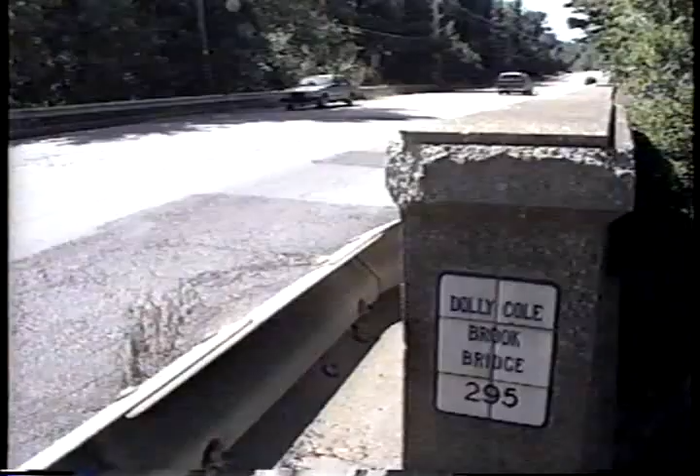Across the nation, roads are crumbling, and the bridges that span or link these roads are going with them. In fact, over 40% of the nation's 575,000 bridges today are in need of repair or replacement, and a majority of those are in rural communities, where small bridges cross over rivers, streams, and wetlands.

Rhode Island is no different from the rest of the nation when it comes to road conditions. Many of our 700 or so bridges are in rural areas, ineligible for federal highway assistance when they need reconstruction. The State Department of Transportation is responsible for monitoring their condition, posting load restrictions, or closing those that are unsafe

altogether. In terms of percentage of bridges, I might pull a figure of like 25 to 33% of the bridges are needing some sort of work. Of that, a good percentage will need replacement.

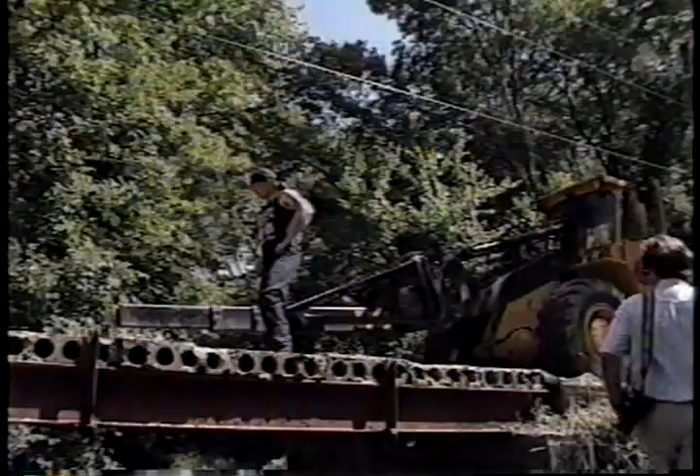You know what we're going to have to do? When you lift those planks, we're going to have to store them off to the side, bring the load bed out, load them on the load bed, and cart them out, because there's no way you can put these in the truck.

Walter May, the Public Works Director for Foster, Rhode Island, has become well acquainted with the problems of bridge deterioration in a small town. A deteriorated road is one thing, but a deteriorated bridge can shut down a whole section of town. And the rating of this bridge was down to about 6 ton, which would prohibit school buses, fire trucks, some emergency services, contracted for services, deliveries, all of those types of traffic that have to have access to the public have to detour around so they can avoid a low-rated bridge.

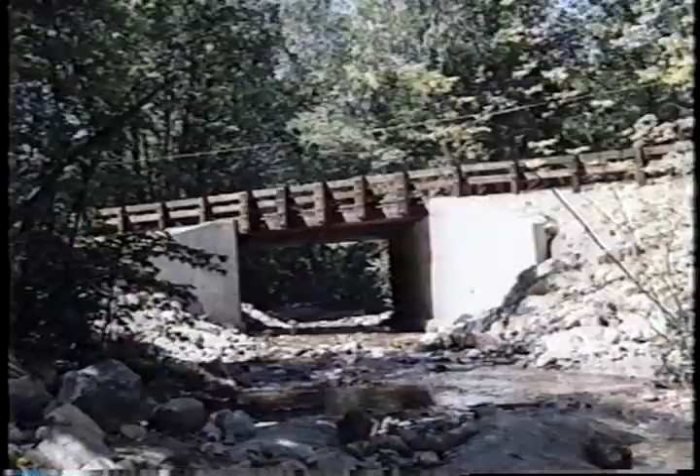Recognizing this threat to America's crumbling infrastructure, the United States Congress funded the Timber Bridge Initiative in 1989. Using methods pioneered in Ontario in the 1970s, over 200 demonstration timber bridges have been built across the country to show that small communities can replace their bridges in less time and with less money using locally grown, pressure-treated wood, rather than concrete and steel in construction.

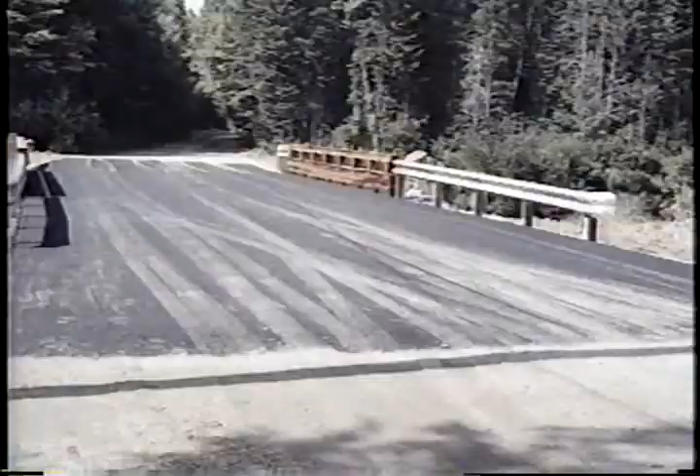Rhode Island RC&D is very interested in this because it does promote rural development. It has local people solving local problems and using local resources to do it. In this video, you'll see how, through a collaborative effort of federal, state, and local agencies and businesses, a demonstration timber bridge was constructed in Foster on North Road, spanning 22 feet across a small river.

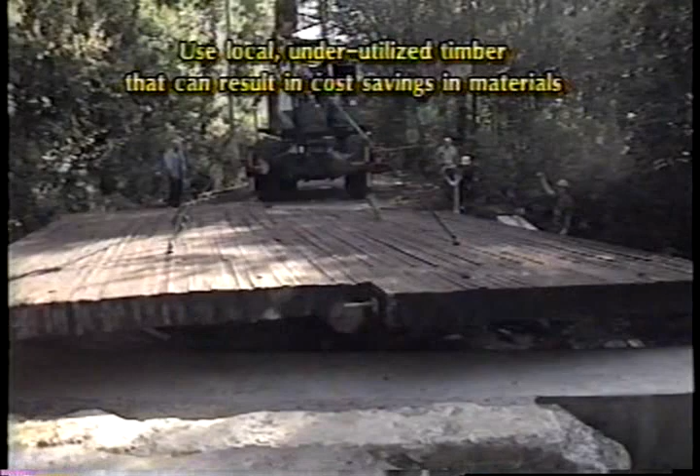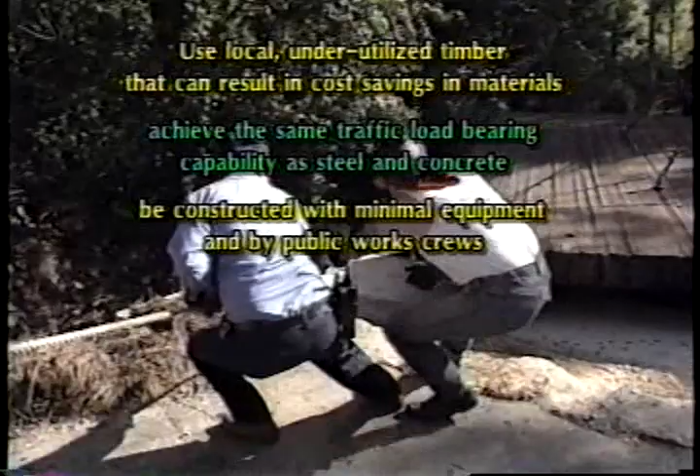You'll see how this bridge was engineered to use local underutilized timber that can result in cost saving in materials, achieve the same traffic load bearing capability as steel and concrete, be constructed with minimal equipment and by public works crews, be installed in a fraction of the time required for steel or concrete bridges, and reduce maintenance costs over time.

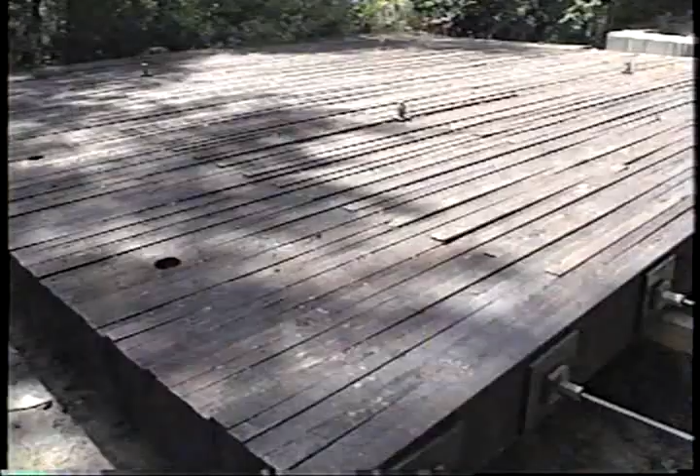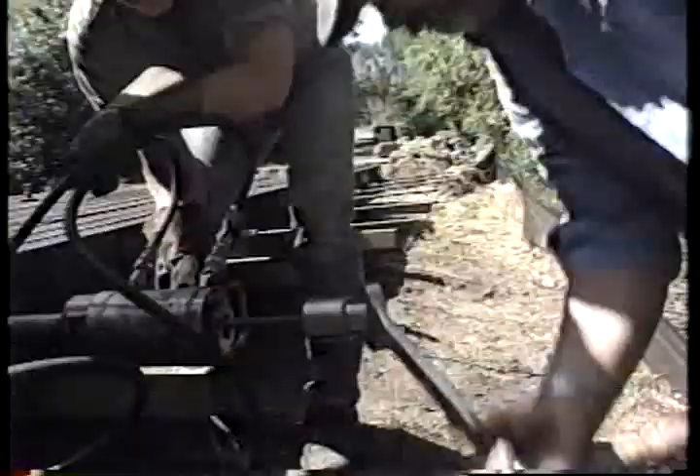In typical bridge construction, for a lot of the steel and concrete bridges, you have steel girders and then you have a deck. In this case, for the Foster Timber Bridge, you have 2x10 red oak planks, which are all bolted together with about, I think, 60,000 foot-pounds of torque. And it has plates pushing it together, too, with the nuts. And that makes it like one, basically, 10-inch thick plank. And it's incredibly strong. It serves as both the deck and the girders.

These bridges are not quite the old-style timber covered bridges that everybody imagines. You could put that type of structure over one of these. They look pretty modern. They are contemporary looking in their design now. You won't be able to tell it's wood. It'll be covered with asphalt, so when you're driving over it, you won't know it's wood.

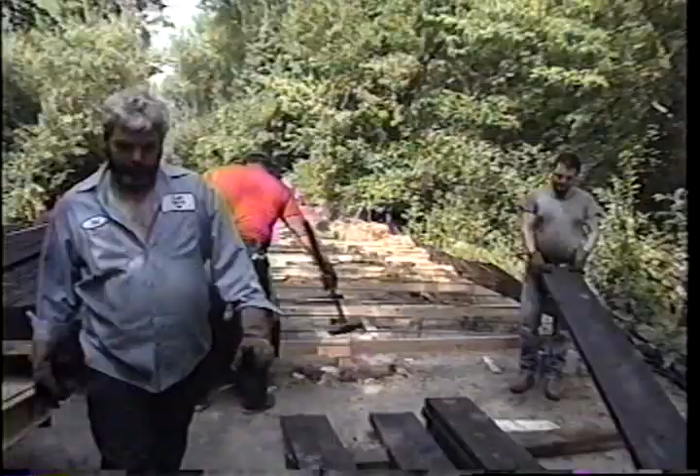All of the bridges in Rhode Island traditionally have been designed, that is, interstate bridges and every other one that we've had a part to do with, have been designed for what we call a 20-ton two-axle vehicle and three-axle tractor trailer that weighs 36 tons. And this particular bridge is designed to meet those loadings, and I think it may exceed those loadings. It'll be able to handle any of the normal traffic that a bridge would be required to take.

A 20-ton capacity will be more than enough for school buses, emergency vehicles, and trucks passing through North Road. But the old bridge was only 14 feet wide, and the approach had a skew in it. Talking about a road realignment, widening the bridge, increasing the capacity, and changing the construction of it to accommodate an easier replacement when the life cycle of this bridge expires.

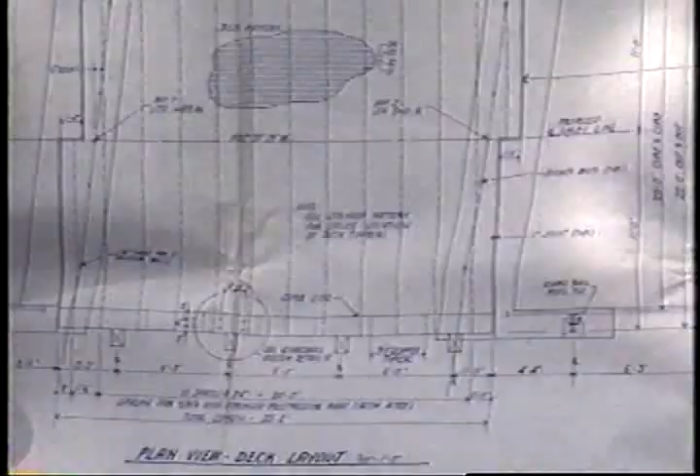Because the bridge needed more than a deck replacement, an engineering firm was brought in to survey the site and furnish detailed plans of the bridge specifications. We were able to furnish the town with not very comprehensive detailed plans.

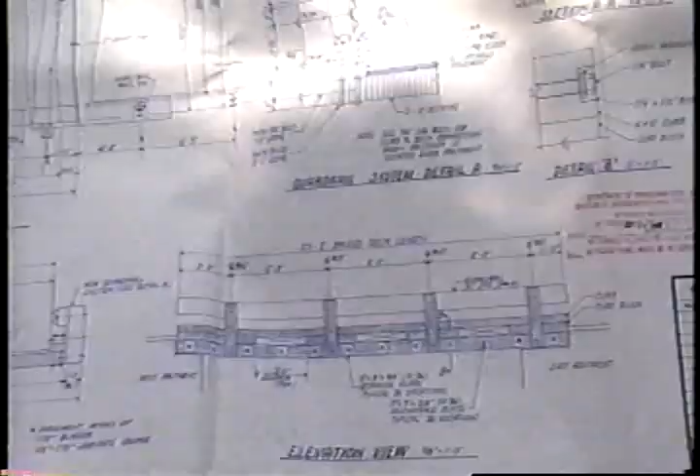We tried to minimize the cost involved, but we gave them adequate plans so that they could build a bridge, you know, from some set of engineering plans, which are required on almost all projects. Regardless of how simple the project may seem, to some degree you do need some expertise involved in planning the project and putting that down on paper.

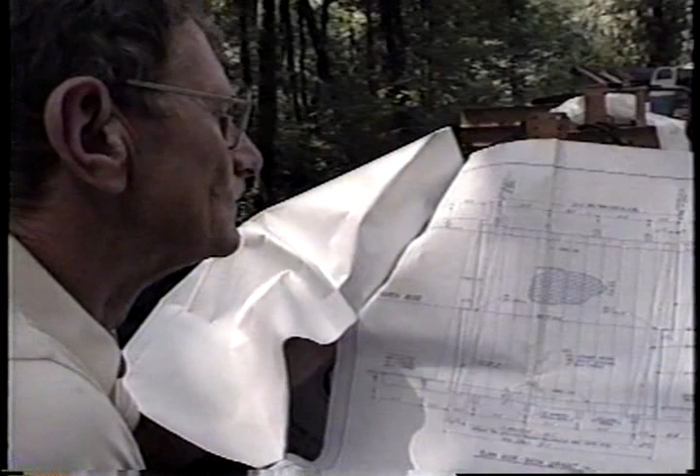On this particular bridge we're using 2x10s. That was all that was required for this span length, which was 22 feet. We are using red oak, which is native in Rhode Island, so the locals could inexpensively get the wood for the bridge. And in other states, they have used Douglas fir or southern pine or different types of wood.

So we have to actually do some tests to see the applicability of this type of wood for stress laminated bridges. The timber that we use right now is red oak. That's probably one of the most predominant species in the state.

Some communities right now are working on acquiring open space and making town forests. The savings there is that they don't have to go out and buy the timber. They already have the timber. They can just go to these areas, harvest the timber, and then utilize their own trees for their own bridges.

In Rhode Island right now, trees are growing 3 times faster than we're taking them out. There's so many trees growing. Proper utilization helps us manage our woodlots. We're at the Red Oak Tree Farm here in North Scituate. It's a tree farm managed by Steve Thomas, who does an excellent job managing his woodlots. Like many other tree farmers here in Rhode Island, these lots are where we come to find the wood.

This is a northern red oak. It's about 36 inches in diameter. Most of the trees that were cut for this timber bridge are right from the local area, Foster, Glocester, Scituate. We didn't go out and mark this timber specifically for this product. We went to the mill and graded it at the mill. Then we selected the better quality stock here, right in the Foster shed over there, to be treated at the lumberyard.

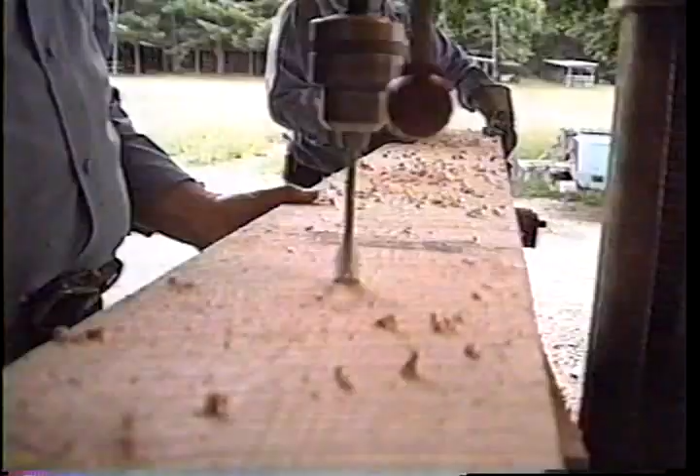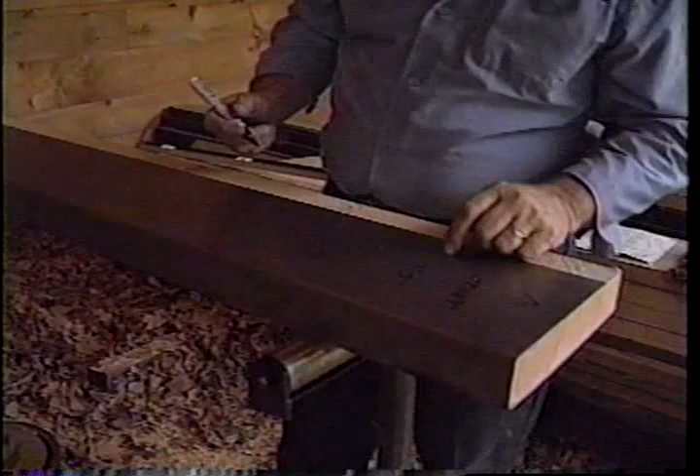What we do is we take the planks, these have all been sawed and squared. Then we lay them on the rollers and we put a template on there, mark the template, and then we slide them on the drill press and we drill the holes. Then after all this process is done, we send these out to be pressure treated at Permatreat out in Connecticut. The treatment of the timber is done right over the line in Connecticut.

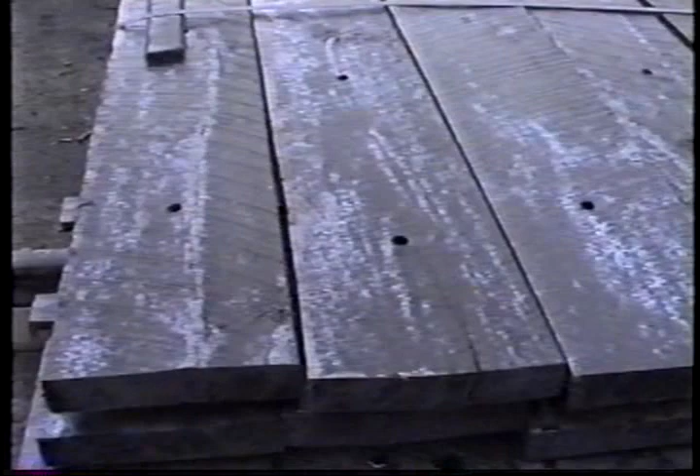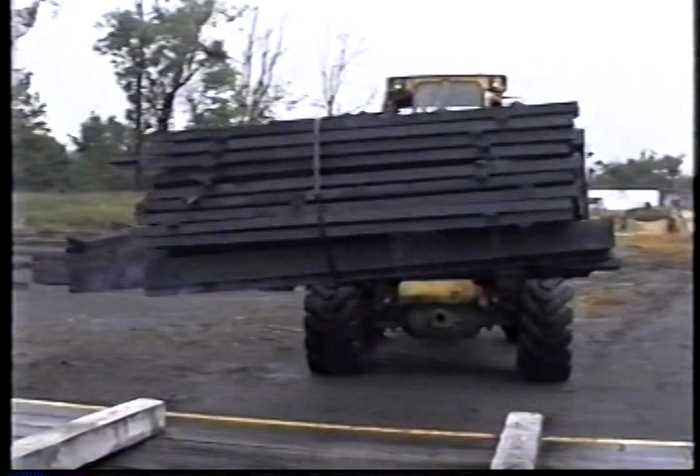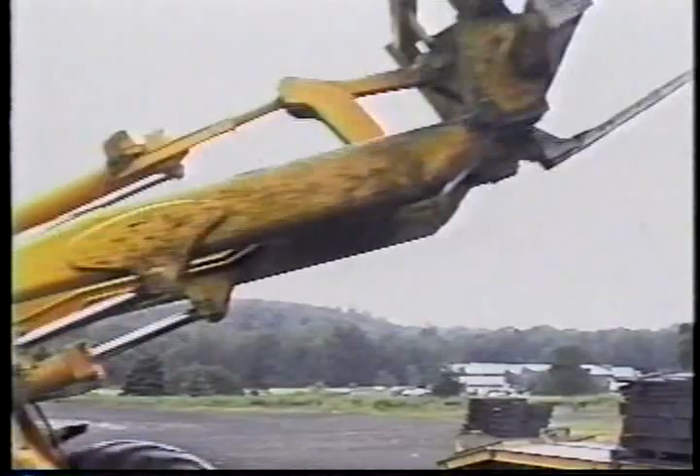That treatment is not as dangerous as it used to be. What we do is we have a clean treatment done. It means the creosote doesn't sweat, doesn't come out of the wood as easily. It's pressurized into the wood. And when you're handling it, you do have to wear gloves. It can burn you. But as for it dripping into the river once the bridge is built, that won't happen because it is a clean treatment.

Well, the creosote pretty much keeps the water from getting into the pores of the wood and causing fungus decay and letting insects get into the wood. What is supposedly unique about this particular type of structure is that, number one, it's pressure treated. Number two, it's pressure treated after the holes are drilled. And number three, it is laterally post-tensioned to keep it all in compression, keep it all very tight and sealed off from moisture, etc.

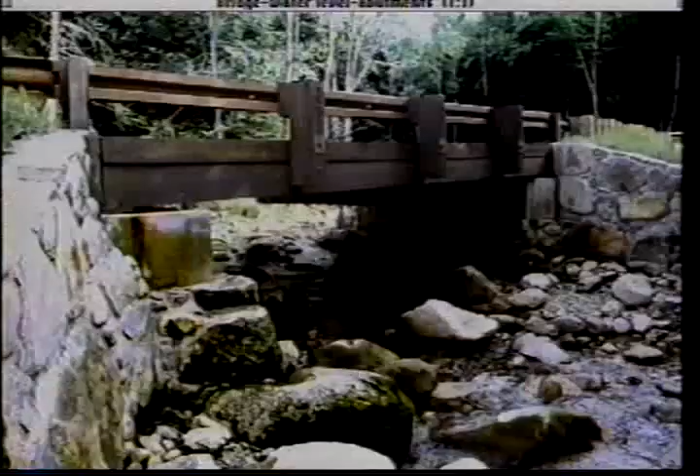The I-beam, you can see there's some deterioration here. Road salts and de-icing compounds are the enemies of concrete and steel bridges, and regular painting of the steel beams is necessary to prevent rusting. But pressure-treated timber bridges are unaffected by salts and resistant to moisture. Less maintenance means a long-term cost savings to the towns.

It should be a very low-maintenance bridge, and it's not affected by the elements. It's not affected by road salt. This bridge will have a covering of asphalt, which will protect it. If that asphalt starts to break up and crack, it should probably be periodically replaced, and this will kind of protect the wood below it from moisture intruding.

Concrete and steel bridges show deterioration, significant deterioration, in a period of, say, 20, 25 years, at which time we have to get in and do something about patching and painting and fixing.

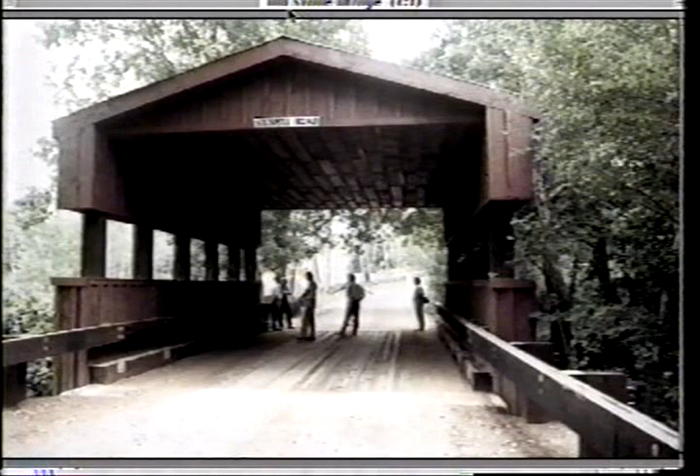The Timber Bridge Initiative folk have indicated that these bridges will last 75 years. Another advantage to timber bridges is that they take less time to construct than steel and concrete. Once a wetlands permit is obtained, the abutments are ready, and the engineering plans are drawn up, the rest is just putting the pieces together. Ease of assembly means less downtime for the bridge, and a savings in labor and equipment. The U.S. Forest Service reports initial studies indicate timber bridges cost approximately 20% less than steel and concrete equivalents.

A timber bridge has certain advantages in that I think they can be built easily by a municipality that has a certain amount of skilled or even semi-skilled help to put it together. It doesn't require a great deal of equipment, and most people know how to work with wood. So I understand that it's possible to install these bridges, to have the old bridge deck taken out and a new one put in within a week's time.

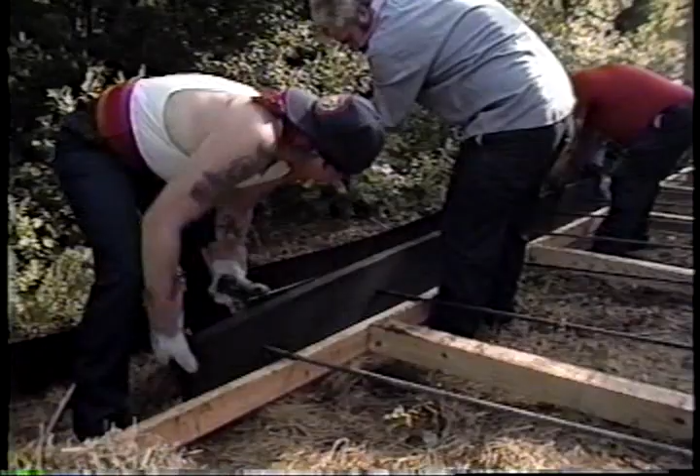We're talking weeks for steel and concrete, for the concrete to cure, and a lot of downtime where the bridge is closed, where you can have it done within a week or 2 weeks with timber bridges. Just because you're manufacturing the deck right there. You pull the old deck out, you make some cleaning up and some alterations, then you drop a new one in and put your wear surface over it. So it causes a lot less inconvenience to the motoring public, provides for greater safety in a much shorter period of time and less rerouting and detouring of traffic.

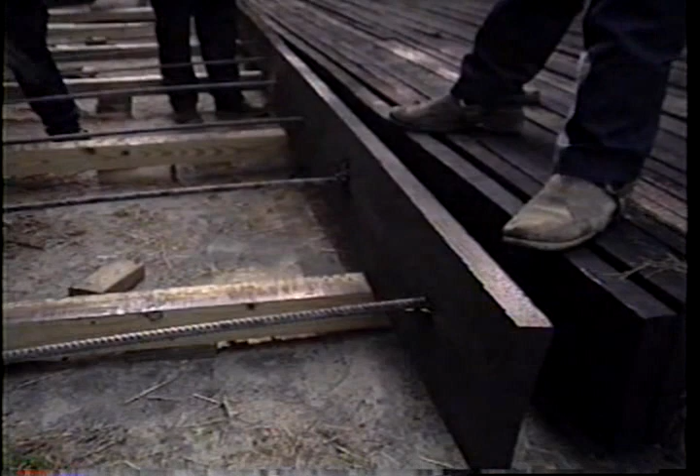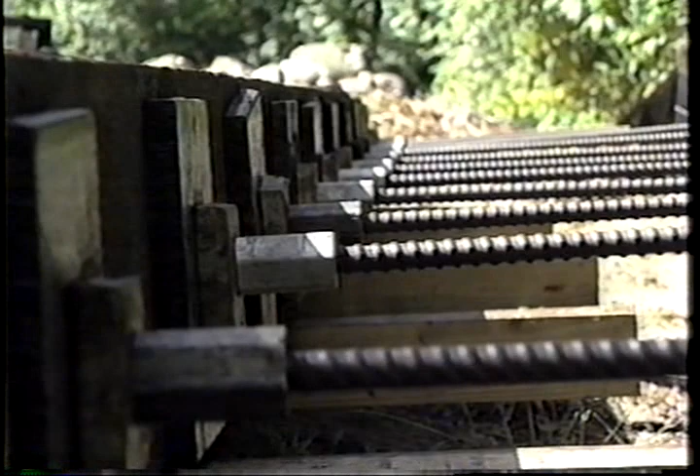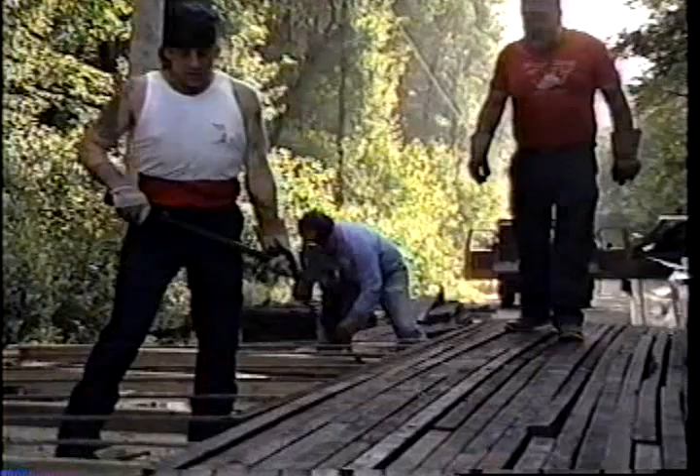There is a system of long rods, which are called post-tensioning rods, that go through these pre-drilled holes, and they're secured on both ends by a system of plates and nuts that compress the lumber. But I would expect that we should be able to assemble it within several days after we get the material on site, and I expect it not to take more than 1 day to hoist the bridge deck onto the new abutments and secure them.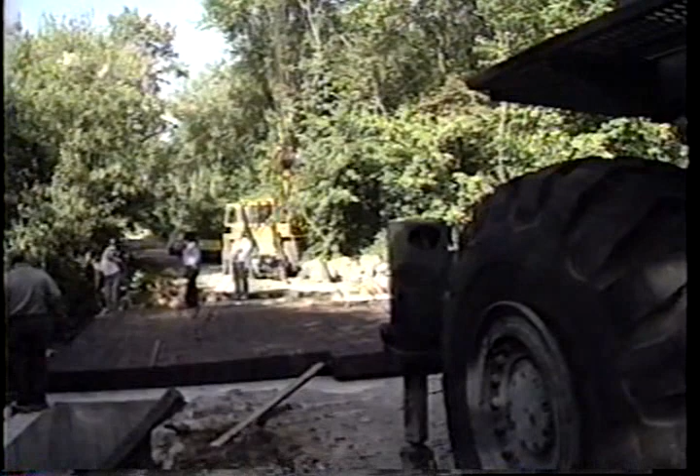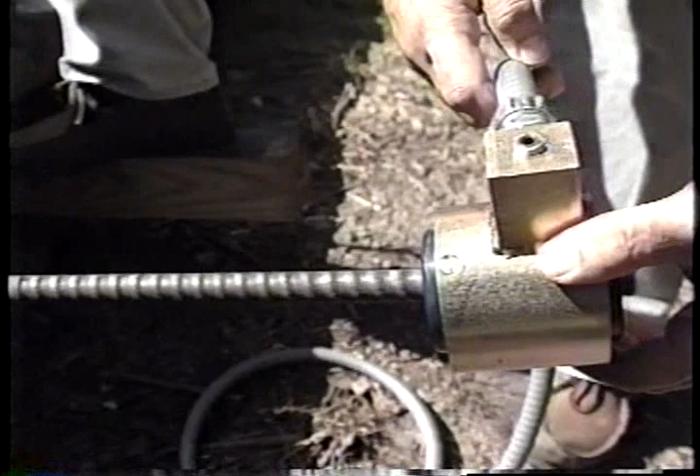There will be load cells embedded in the deck of the bridge, and URI are going to come out here and do readouts periodically, and they'll be able to tell what the inside of the bridge is, how it's taking the stress. So what we will be doing actually is we'll use these load cells. We'll thread the load cell in the rods, and we'll be placing one more steel plate exactly like this one on the other side, and we'll be tightening the load cell with the force about 26 to 27 kips.

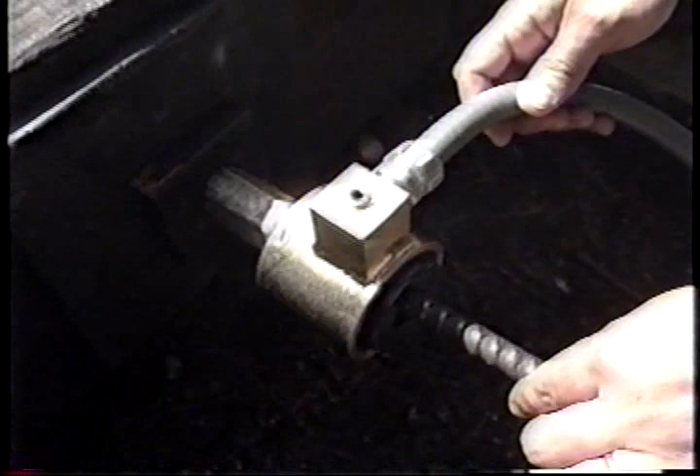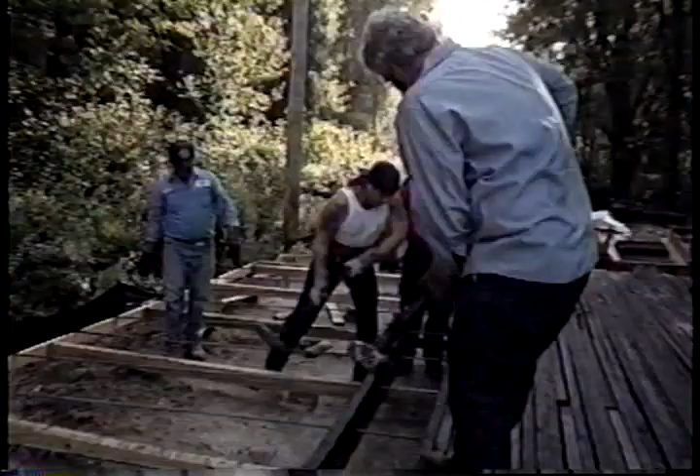And we'll be monitoring this force using a load cell readout box. We'll be taking a reading before we install the load cell, and then afterwards once a month, and by the difference between the two readings we can figure out how much is the force and how much does it change. If there is a need in the future, we can come back and restress those rods to their original force. And cooperative extension at URI helped to get engineering involved, and by doing this post-testing we'll be able to see how the bridge is changing, what needs to be done to keep it up, and it will provide a really good record for other bridges as to how to handle the bridge after it is constructed.

From the community revitalization point of view, it's mainly getting the community to think that it has a resource, that it can do something on its own. We've proven here with some measure of success that public works people do have the skills necessary to build one of these. They'd rather be doing this than some of the other tasks that they have to do. After they retire from this job, they'll be able to run their grandkids over it. And I built that bridge back in the 1990s.

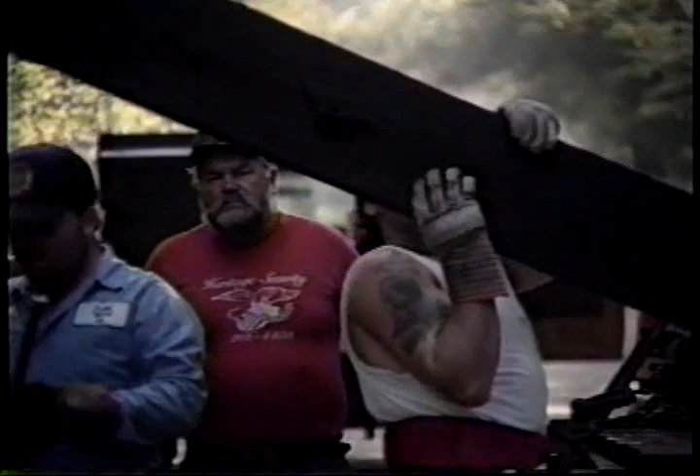The Timber Bridge Initiative here I see as a boon to any municipality that has the resources and the talent to get involved with these. It's a renewable resource, wood. With average mechanical skills, local people can do it. It would promote local economy, and it allows the municipality to replace part of their infrastructure that's been deteriorating for years.